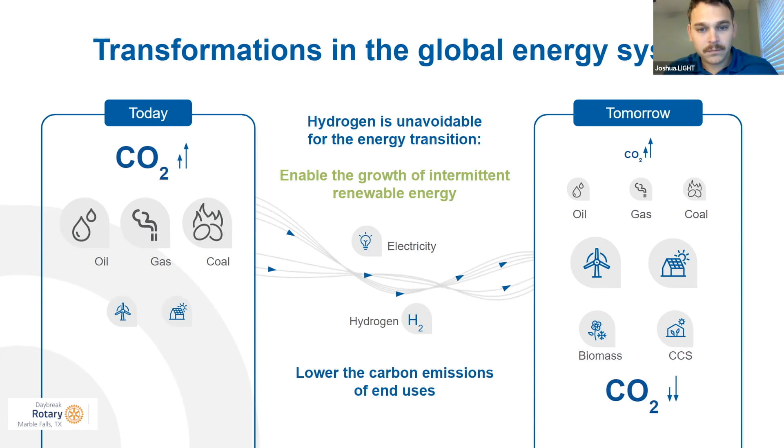Hydrogen's role in the energy transition is very important because it produces no emissions at the point of use. In a car, where it's used in a fuel cell, the emission is water. If you burn hydrogen for heating purposes, again the emission is water. So there are a lot of different applications for hydrogen, and using green hydrogen in all of these applications will be a way of reducing carbon emissions from that process.

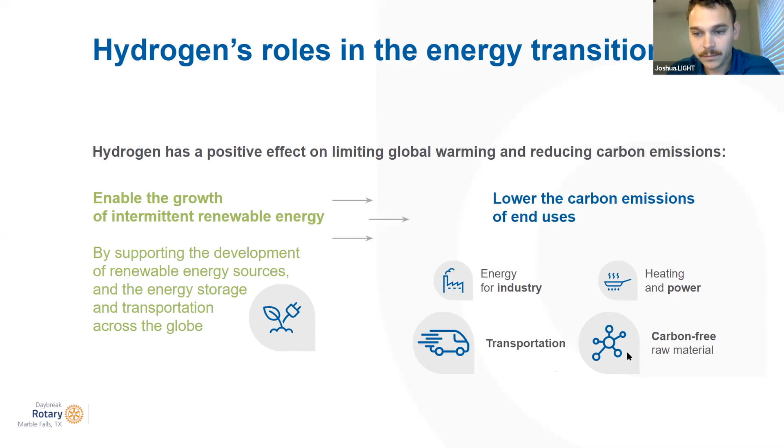As I mentioned, there's the energy transition for mobility, where we're using a fuel cell in a vehicle, but then also heating—using hydrogen actually to burn it as a heat source—and then replacing hydrogen in the chemical manufacturing process with green hydrogen. So I'm going to grab it.

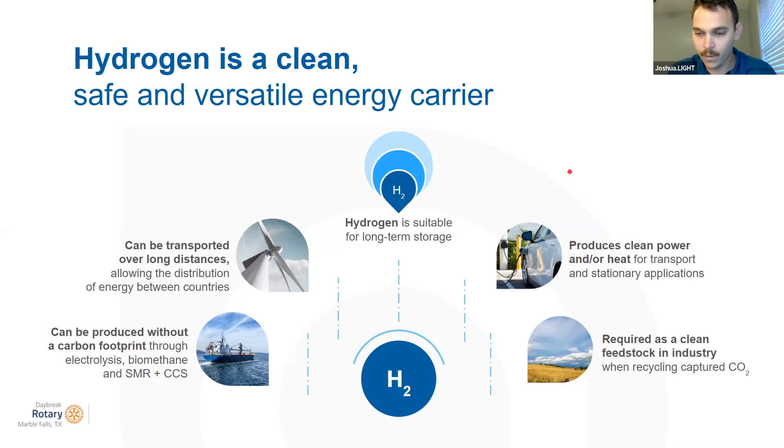Being a newer energy vector, there's a lot of pros and cons to weigh about hydrogen, and this slide goes through a few of them. We talked about the carbon footprint, but because it's a chemical carrying the energy, a molecule, it can be transported just like gasoline to many different spaces. So you don't have to run an electrical line everywhere you go. That's the most important part of that.

The hydrogen energy industry is really developing from our traditional hydrogen business. In our traditional hydrogen business, as I mentioned before, we support chemical manufacturers, refineries, but we've also supported industry by providing molecules to electronics manufacturers, like at fabs, and the space industry. We're very involved with the European space industry and are getting more involved with NASA.

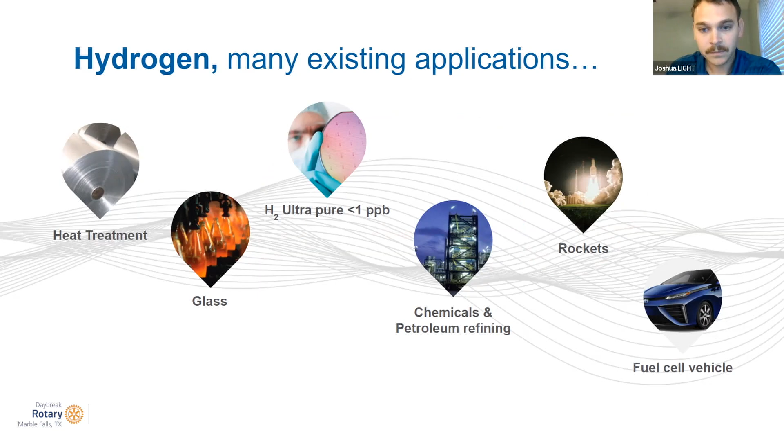Whenever we talk about scale, and I mentioned that 20% of final energy use before, it's interesting to note the different areas in mobility we're focusing on. There's already a lot of individual consumer vehicles in California, and those stations consume 100 to 200 kilograms a day. That area is continuing to grow, but there are a lot of other exciting solutions developing as well. For me, one of the most exciting are semi trucks, because honestly, batteries are not a good solution to propel a semi truck due to their low energy density and high weight, and hydrogen fuel cells are going to play a key role decarbonizing the heavy duty sector.

I want to show you real quickly how fuel cells work, because one of the first things Mr. Lackey always asked was how does hydrogen actually work? What does the engine look like? So I want to pause before transitioning to that, to see if you have any questions.

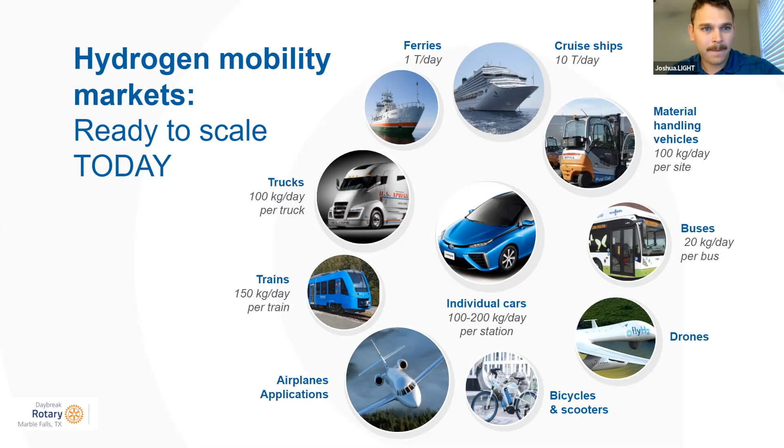Thank you. All right, so we work with Toyota a lot, and I found this video of Matt McClory, an engineer I work with, explaining how fuel cells work. There's a trick to sharing your audio—I don't know if I'm sharing it right now in Zoom. No, it didn't. Okay, go ahead and try.

Share sound. That's how I'll do it. Okay, now we'll try.

That's why I talked to Matt McClory, an engineer with Toyota who is here today at CES.

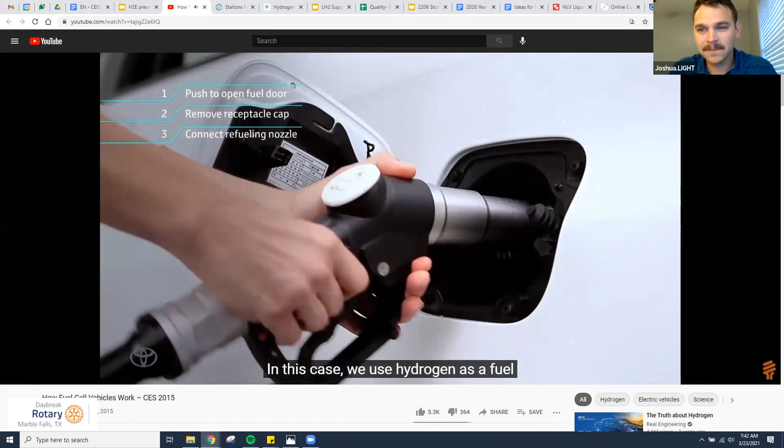Well, at a very high level, it's an electrochemical engine where you can directly convert energy into electricity. In this case, we use hydrogen as a fuel combined with oxygen from air, and we directly convert that in an electrochemical cell into electricity that allows us to drive the electric motor for the wheels.

All right, now correct me if I've got this wrong, but as I recall, when you combine hydrogen and oxygen, besides the generation of electricity, you end up with water.

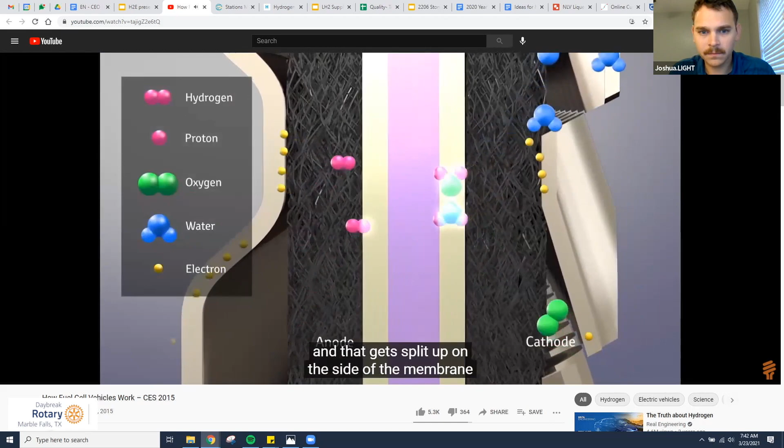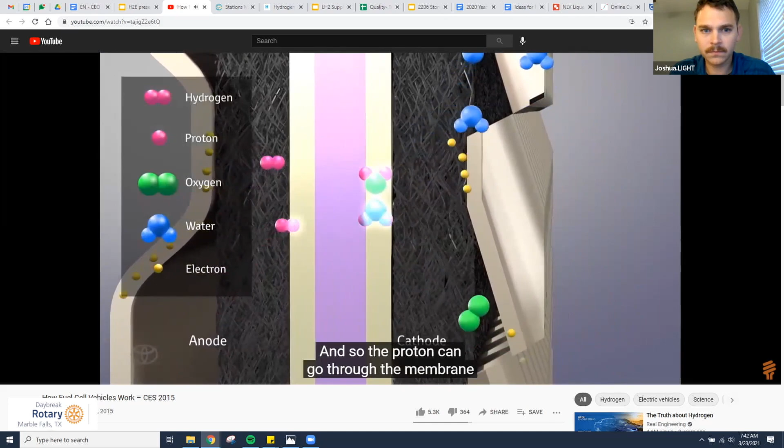Exactly. So the way the membrane works is that you get hydrogen from one side onto the fuel side, and that gets split up on the side of the membrane into a proton and an electron. But the membrane is an electron barrier, but a proton carrier. So the proton can go through the membrane to the other side, but the electron has to take an external path. When it takes that external path, it goes through the traction motor. That allows you to drive the car.

When the electron comes back on the other side, on the air side, it combines with the proton and the oxygen from air, and it makes water. So that's it. You've got hydrogen on one side, oxygen on the other, and you end up with electricity and water vapor, no carbon. Great.

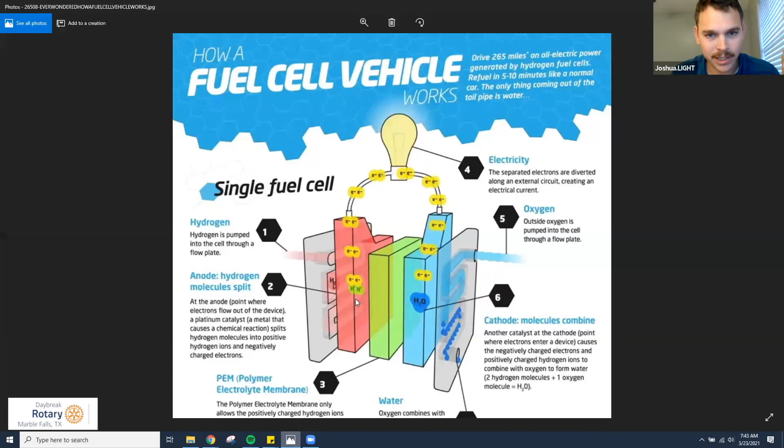Yeah, and so that's kind of a high level view of how a fuel cell works, and how it looks in a car is even a little bit different than that. So I wanted to pull up this graphic to just show you how it actually does look in the vehicle.

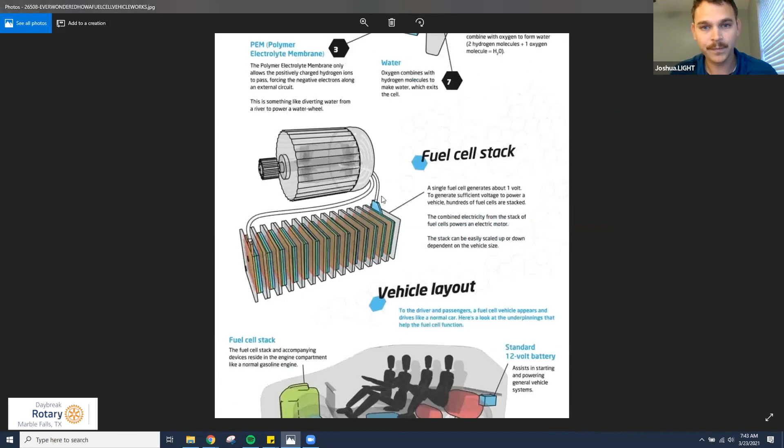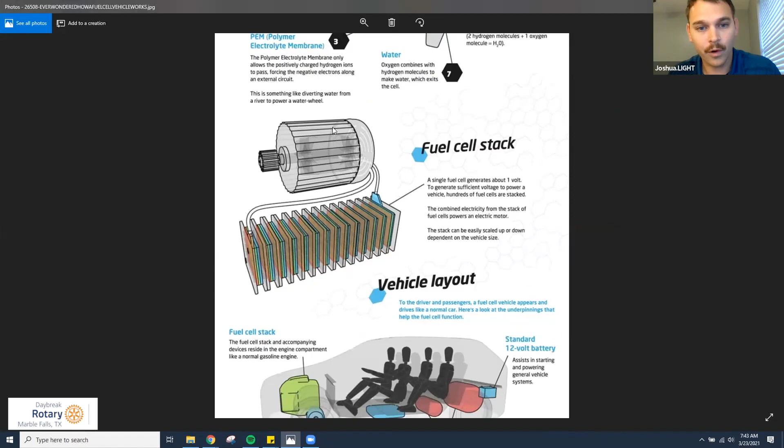And so you start with that fuel cell stack that they just talked about. You put a lot of those together in different layers, and that's what creates a high voltage that's going to produce electricity you can store in your battery or run the motor. So there's quite a few components. Of course, you have to have the hydrogen tanks in the vehicle, a battery, and then the fuel cell stack and the electric motor. This was a graphic published by Hyundai, so it's more focused on their layout.

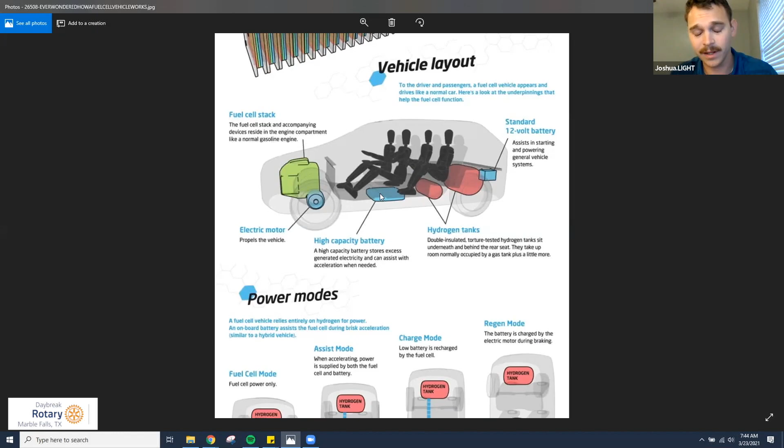Toyota's is just a little bit different, but the same methodology. And then the vehicle's propelled through a couple different modes. Of course, the fuel cell's making electricity, so the hydrogen can go to the fuel cell, make that electricity, and directly power the motor.

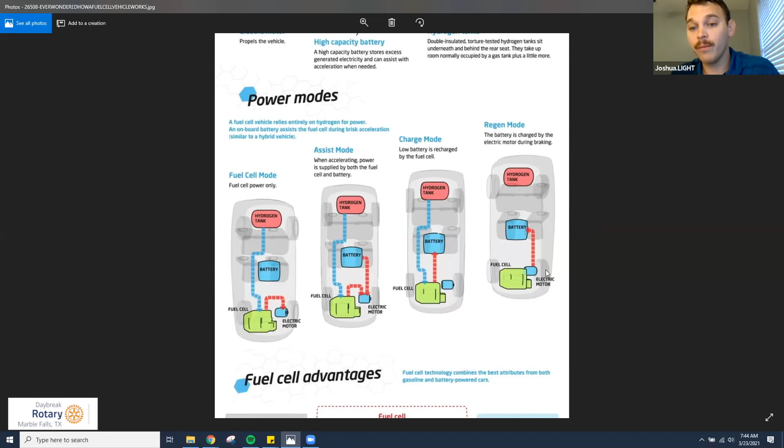There can be the process of the fuel cell making electricity to power the motor along with the battery powering the motor. The fuel cell can charge the battery directly, or the motor, while braking, can charge the battery.

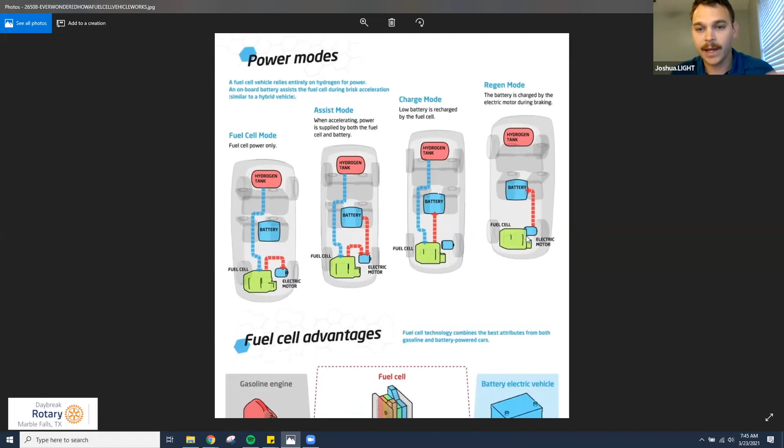And so there are a lot of efficiencies from a fuel cell vehicle. First of all, the conversion of hydrogen to electricity is a lot more efficient than an internal combustion engine. And then second of all, there's all the regenerative braking and other aspects of this vehicle.

Whenever we look at fuel cells, they kind of fall in a really nice position whenever you compare them to batteries, because of their ability to fill up quickly, but also they of course have no emissions. They're quiet because it is still an electric vehicle.

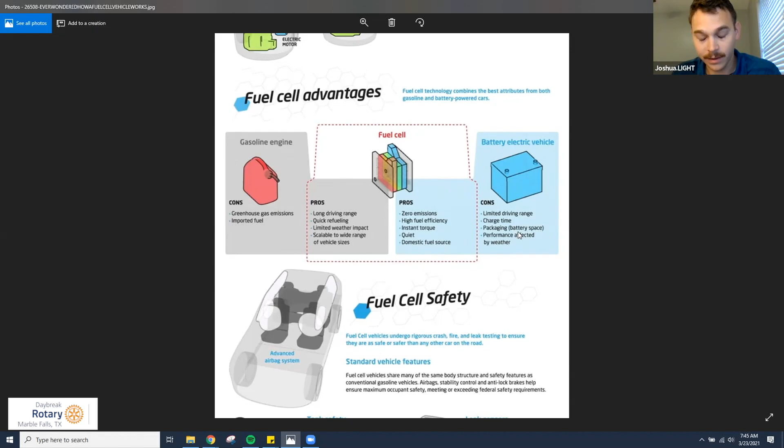And so it's kind of a nice position, taking in this graphic shows it taking in the positive aspects of an internal combustion engine and the positive aspects of an electric vehicle, without the limitations. And something that always gets brought up is safety of the vehicles.

Toyota is a notoriously conservative company, and they have definitely applied that methodology when developing their fuel cell electric vehicles, and so have we on the equipment supply side for the hydrogen stations. So there's a lot of testing to make sure that this entire system is pretty foolproof.

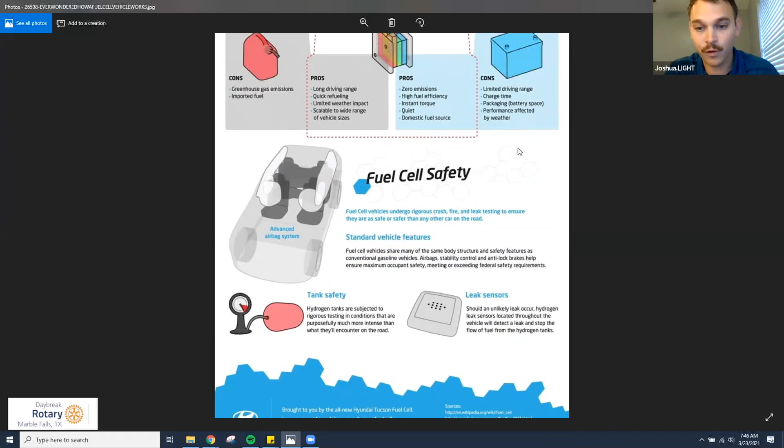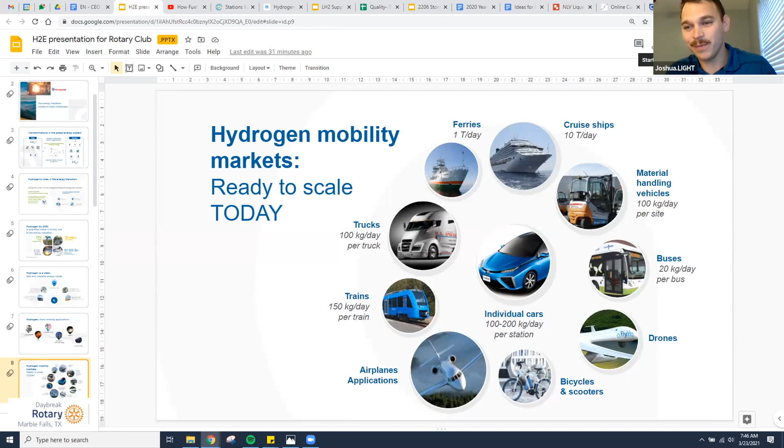Okay, so that was the interlude I wanted to go into real quick to talk about the fuel cells. The fuel cells aren't what we do, but they're such an important part of how you use the hydrogen that I wanted to be sure we talked about it briefly. And then to talk a little bit more about what Air Liquide does.

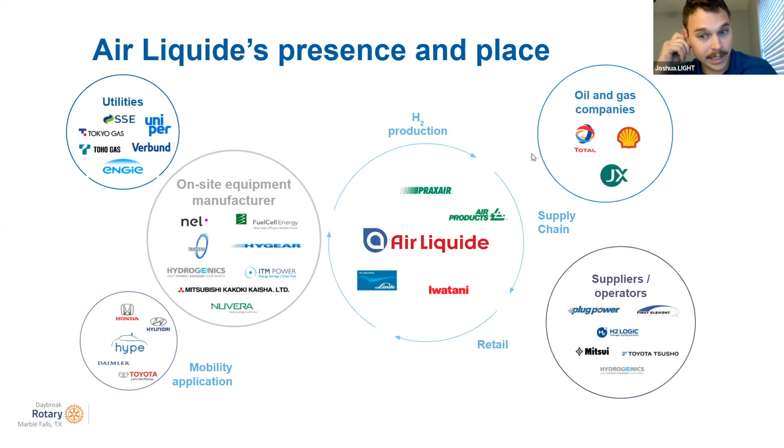Air Liquide has already started investing and is continuing to invest. This slide deck is from 2018, and at this point we were really heavily investing in stations in order to develop the demand. As we've grown, we have found companies that are really good at managing the stations, and so we've invested there and continued to make larger investments in the supply chain, so primary production of hydrogen and then the supply chain from the primary production to all these stations.

So you can see here that Air Liquide is involved all over the world. We'll go through each geography really quickly.

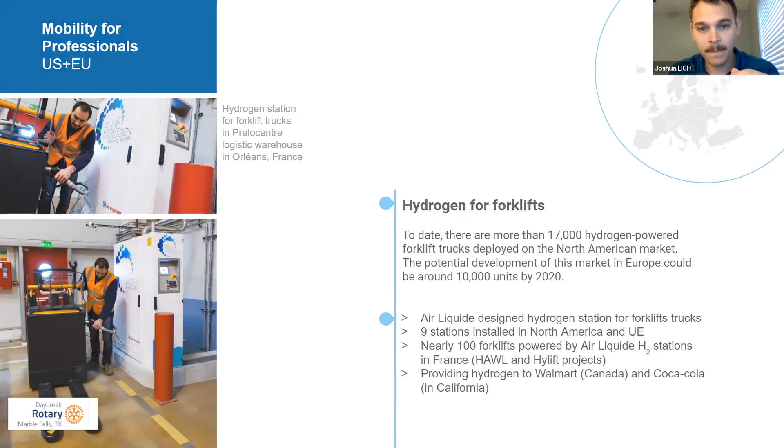And then for the stations, Air Liquide built a network in the Northeast of the US. We worked with Toyota to develop this, so that they could roll out some cars up there.

I don't know if y'all pay attention to the hydrogen space or not, but these stations are not open yet, and there were a lot of barriers from the government. The government said they wanted zero emission vehicles, but then they said you can't drive them in tunnels, over bridges, things like this. So it's been a bit of a frustrating project in the Northeast as we try to help the states get to their goals, and also deal with their own barriers. That's an ongoing process that we're hoping to get very close to finishing soon.

And then in California, Air Liquide owns and operates 4 stations, but right now there's 46 stations in California, and there's also quite a few under construction. Whenever the ones under construction are complete, there will be 100 stations, and that should definitely be before 2023.

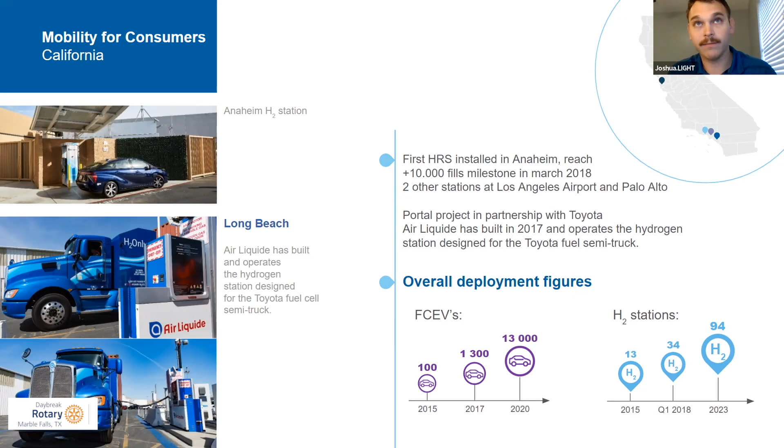There's a lot of activity also in Asia. Japan, Korea, and China are developing hydrogen for their vehicles.

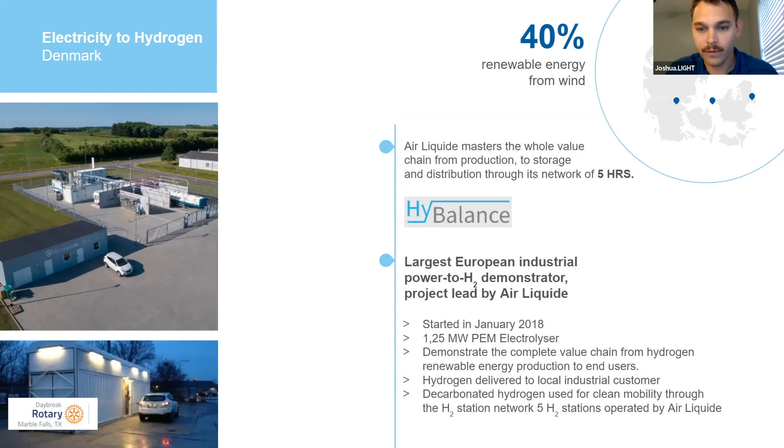And then something that I probably won't talk about much today is the role that hydrogen can play for energy storage. I talked a little bit about renewables and their intermittency. Air Liquide has this project in Denmark where we're converting energy from the grid into hydrogen and then using that in industry. That's kind of the first half of an energy storage system. But I was at a DOE conference two weeks ago, and this is one of the projects that they reference for energy storage.

And then we have Europe, where there's a lot of different activities as well. In France, Air Liquide helped drive fuel cell electric vehicles by buying a taxi fleet of fuel cell electric vehicles, and we fill them from our stations. Air Liquide has some ownership in Hype, which is the company that runs this taxi fleet.

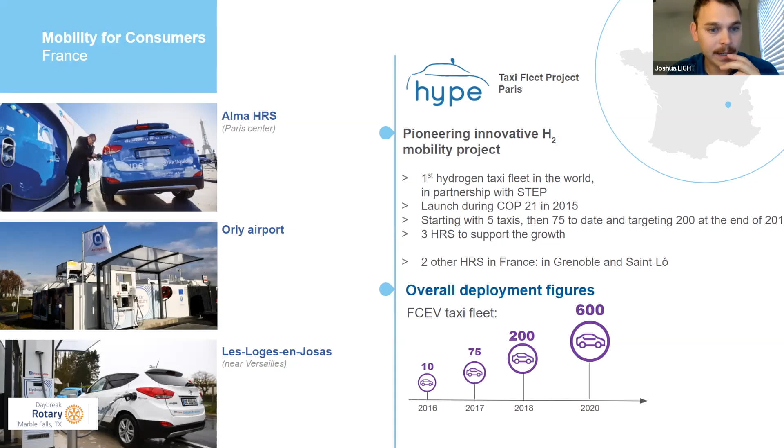So this took a lot of coordination, and Air Liquide is the founding member of the Hydrogen Council.

It's a council that had 39 members, and today it has over 90 members. These are companies heavily involved in the hydrogen space. I was interested to note that they pledged $300 billion in projects in the pipeline, so obviously huge investments. Some companies, if you go back to the beginning, you'd be pretty familiar with their names. It was important to get everyone together on this mission so we could develop the hydrogen energy space effectively, and we're well on the way with that.

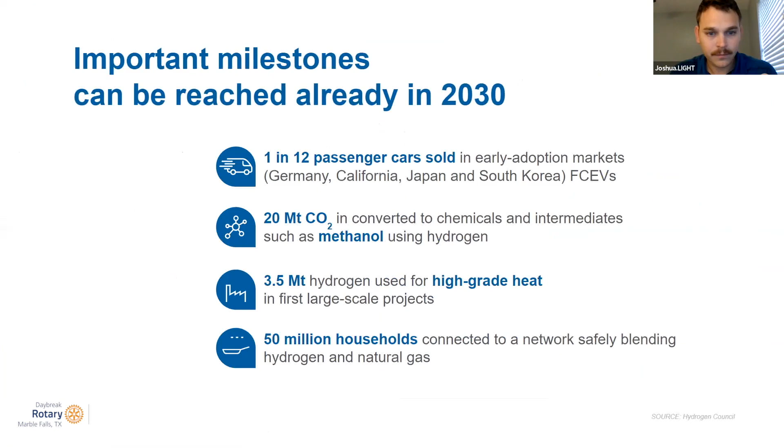Whenever COVID happened, a lot of the stimulus bills had measures for green energy, and part of that green energy is always hydrogen. I went a bit long, but I want to make sure there's time for questions. I don't know if anyone has thoughts about what hydrogen energy may mean for Marble Falls, but happy to talk about that. There are some DOE projects in Texas for hydrogen energy, one of those is at UT.

Are there any questions?

I do have a question, I work in the collision industry. I saw in the vehicle, I'm not sure if you'd know this, but how are the hydrogen tanks, are they stable enough to hold up to an impact?

Yeah, I do know that because hydrogen cylinders are a key part of industrial gas manufacturers' expertise. Air Liquide takes a lot of pride in this, as well as the auto manufacturers. There are a lot of different standards, the Compressed Gas Association in the US, ISO standards around the world. But basically, those are what's called a Type 4 cylinder, and it's carbon fiber spirals around an inner metallic core. That's how it's made.